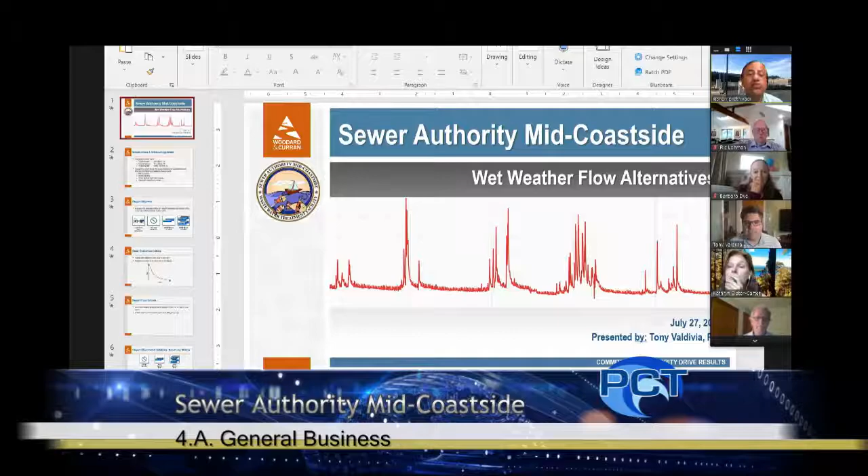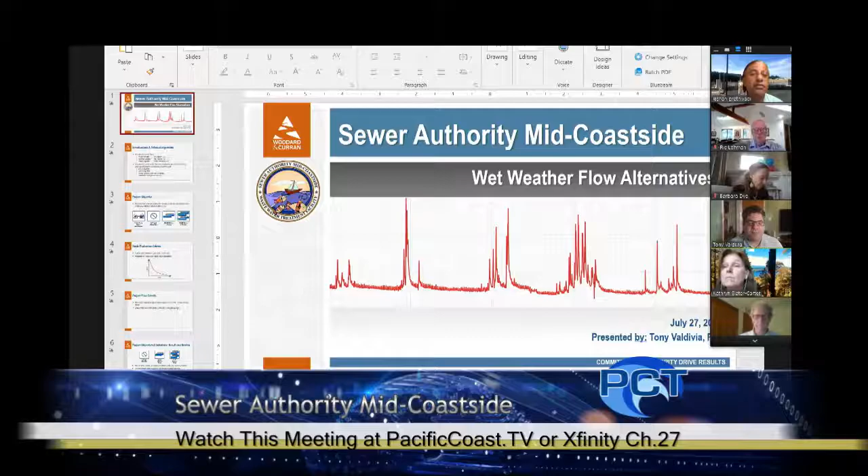Fantastic. Thanks, Kishan. I'm going to try to share my screen, and you guys please let me know when you can see it. Okay, I've given you authorization. Yep, okay, great. Can you see it now? Yes, I can see it. And you see the main presentation? Sometimes when we share these, it doesn't share the full presentation, it shares a version with a preview. Do you see just the first slide? No, we see down the side too. All right, one moment, I will correct that. Yep, I see just the slide now. Oh, you do? Okay, well, let's see if that sticks.

Wonderful. Whose heartbeat is that? I don't know.

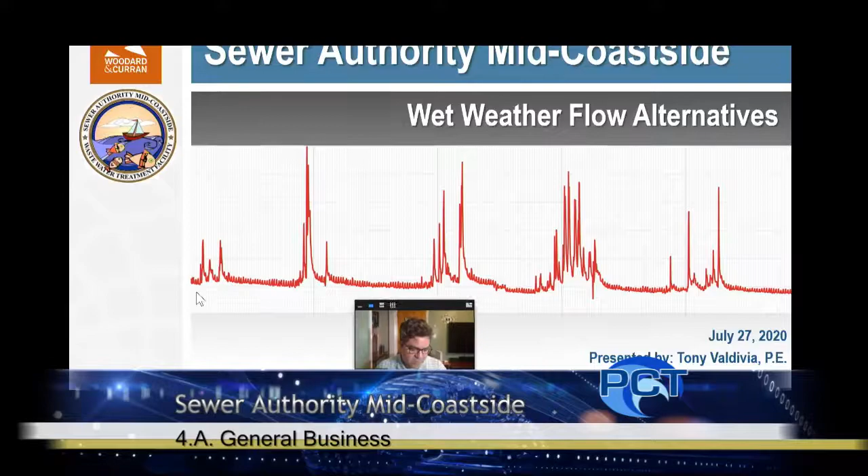Fantastic. So let me know if anything goes wrong with the presentation, please. I can no longer see you since I'm presenting, so if you do have questions and you'd like to stop me as we go, please do. My name is Tony Valdivia. I was the lead engineer for the analysis performed by Woodard and Curran. First of all, I'd like to thank you for the opportunity to do this work for SAM. Just a little bit more about our team and some acknowledgements.

Also on this call tonight is Jim Graydon, who's been the project manager for the effort. Our project engineer, Athena, was instrumental in doing the analysis. So thanks to both of them, of course.

Kishan mentioned the most recent analysis, but of course there's been quite a bit of work done recently and over the years to help SAM solve this problem in their system and really plan for the future. So our analysis is really built on that foundation. It's a strong foundation, and looking forward to sharing with you our results tonight.

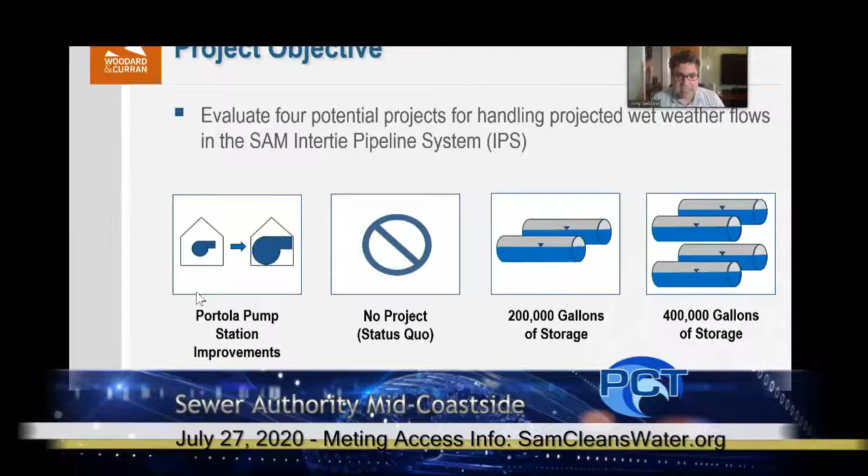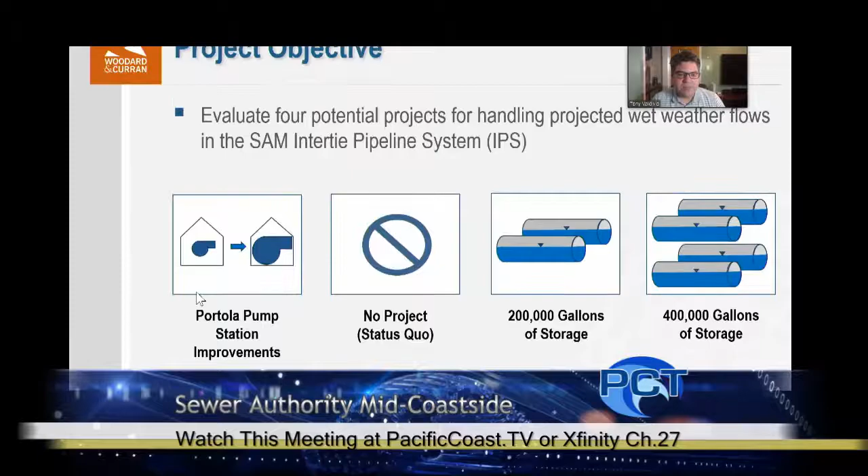So what was our project objective? As Kishan mentioned, we were asked to evaluate 4 potential projects for handling projected wet weather flows in the intertie pipeline system. These are the same analyses that wastewater management specialist was asked to review, so in a sense it is a true peer review of that work, but also looking back into the work that's been done to date. The projects are the Portola pump station improvements, a no project status quo option, 200,000 gallons of storage, which is the project that has bid several times, and then a larger storage option of 400,000 gallons of storage.

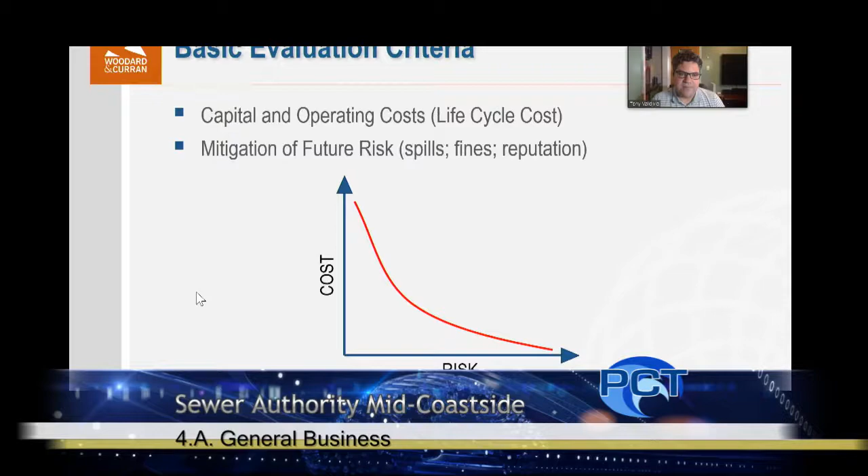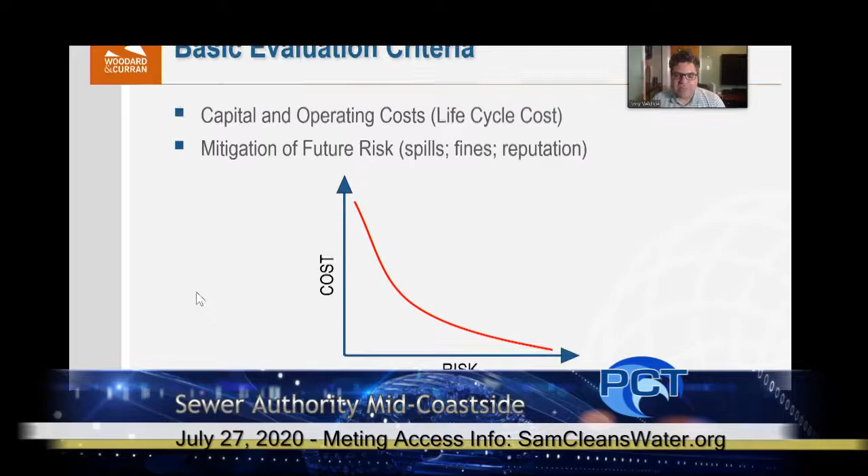Basic evaluation criteria, it's a pretty standard approach on the surface, where we're looking at the capital and operating costs, referred to as the life cycle costs in the analysis for each of the alternatives, but also the ability of those alternatives to mitigate future risk relative to spills, fines, and reputation of SAM. Of course, the curve here is generic, but I think it goes without saying that a higher cost project is generally going to help you mitigate more risk than a lower cost project, certainly true in this case.

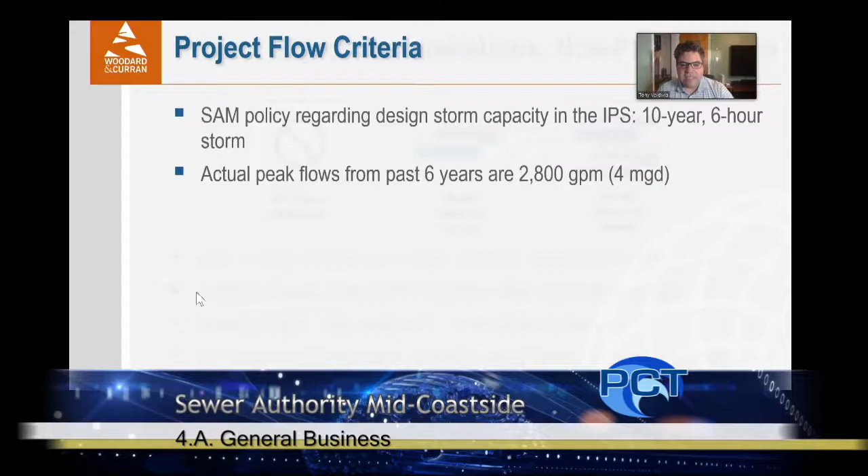Project flow criteria: SAM's board has set a policy that the IPS be capable of handling a 10-year, 6-hour storm. From the flow data that Kishan shared with us, we understand that over the past 6 years, peak flows may have been around 4 MGD, or 2,800 gallons per minute. However, that's not necessarily the storm that needs to be designed to. We'll get to that a little bit later in the presentation.

But first, a little bit about the objectives and limitations for the non-pump station options, which are shown here. Our approach, given the time that was available, was to really rely on prior studies by others, those other firms that I introduced early on, to define the project and the technical details of those projects.

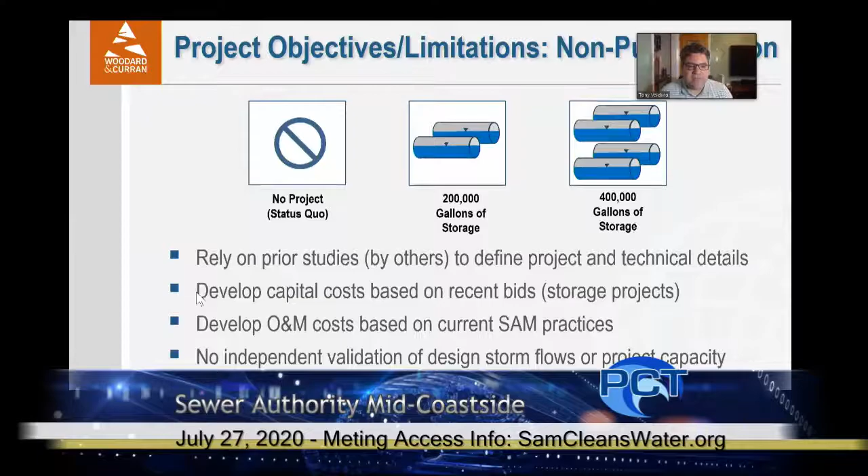We would develop capital costs based on the recent bid for the storage project, and because that was only done for the 200,000 gallon project, extrapolate those for a potential 400,000 gallon project. We would develop O&M costs based on current SAM practices—how much effort is really involved in maintaining the existing storage that you have in the system. And then, very importantly, we had done no independent validation of storm flows or project capacity. So we have relied on those previous reports to really define what those potential flows are into the Portola pump station, or which need to be stored for that matter.

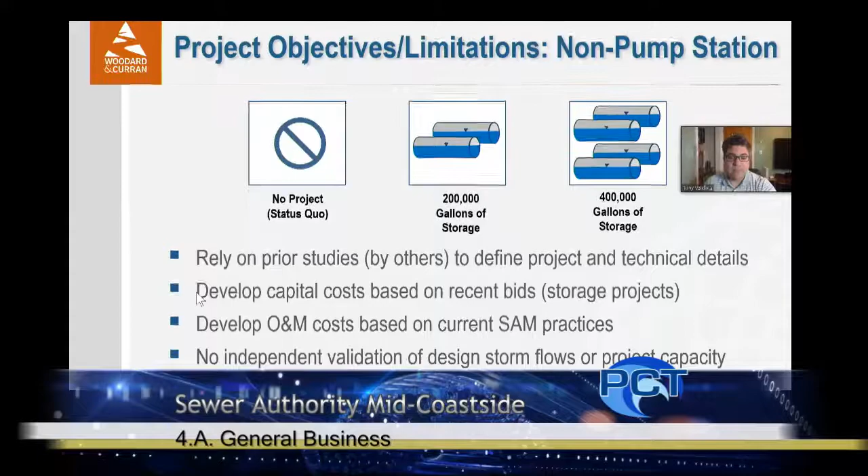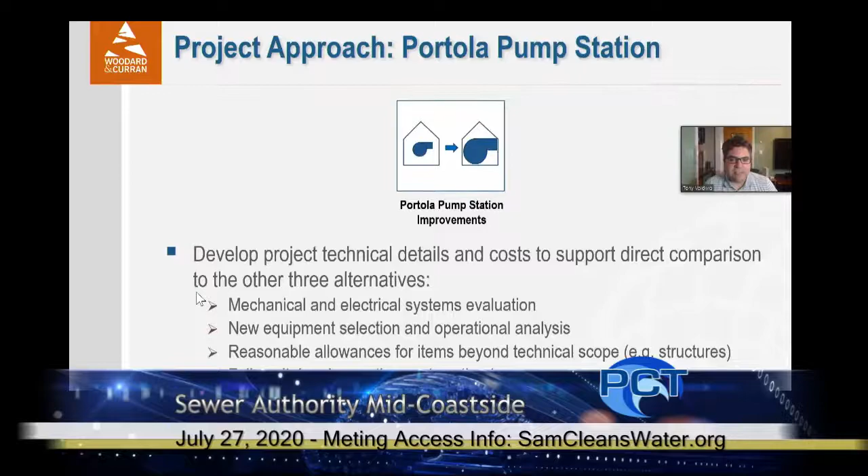For the Portola pump station, the approach was much more involved, and that's because this pump station alternative hasn't been bid as a project. It's not similar to another project. This is the project that needed to be fleshed out to add technical details and costs so it could be directly compared to the other three alternatives.

The most recent work by WMS certainly defined that project, and we tried to move that forward in a detailed fashion so that we could justify some of that cost data. Our work included mechanical and electrical systems evaluation, new equipment selection, and operational analysis for the pump station. We also included reasonable allowances for items that were beyond that technical scope, such as work on the structures or other items in the force main system, which we believe it's valid to assume will have to occur in order to make this project viable. And of course, we prepared full capital and operating cost estimates.

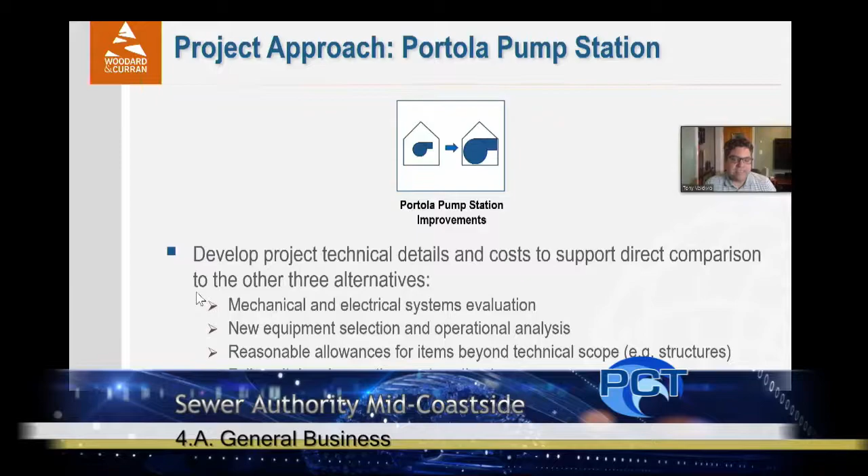There are some limitations to this approach. One is we did not look at the treatment plant. Clearly, a treatment plant with physical and biological processes is subject to some form of disruption if flows change significantly from what it was designed to do or has been doing. That was really beyond the scope of our analysis, but certainly it would be looked at if the pump station project were pursued. We also didn't do a detailed analysis of permitting requirements.

We do touch in the report on the potential to have complications relative to CEQA or Coastal Commission if the project is going to potentially be viewed to have a larger environmental footprint outside of the pump station building, or if it may potentially be viewed to be growth inducing because of the increase in capacity to move water to the plant. Both of those should be considered if moving forward with the pump station.

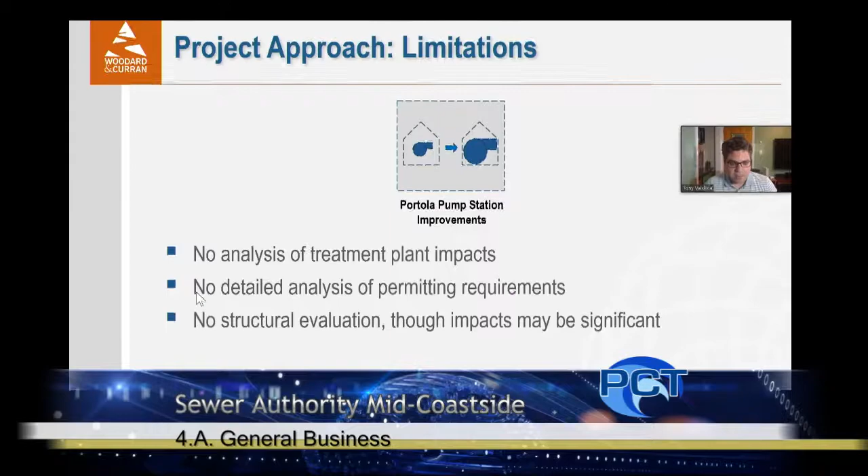And of course, we didn't do a structural evaluation of the building, but a building constructed in 1979, in our experience, won't have been built to current codes, but would require some level of retrofit, either for larger equipment or simply for life and safety, to make sure that building remains standing and functional during a seismic event. That would typically be done with a large retrofit project such as this.

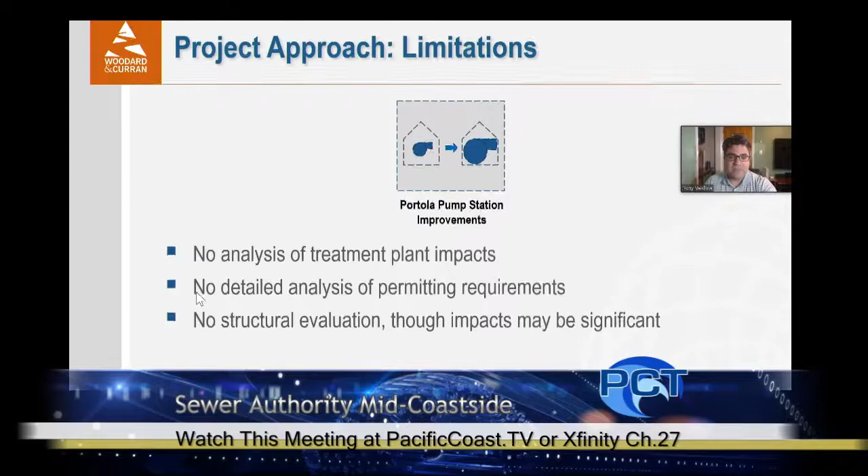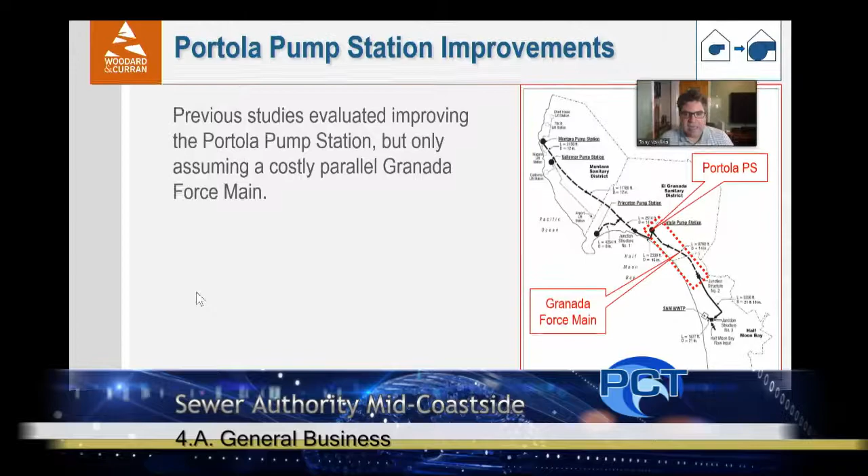So a little bit about the Portola pump station improvements. The idea to increase the size of the Portola pump station is not a new one. Previous studies have evaluated doing that project, doing an upgrade there, but it's always been considered relative to a costly parallel force main to parallel the Granada force main, that being the force main downstream of the pump station. It is an attractive project to be able to handle those flows and push them to the treatment plant.

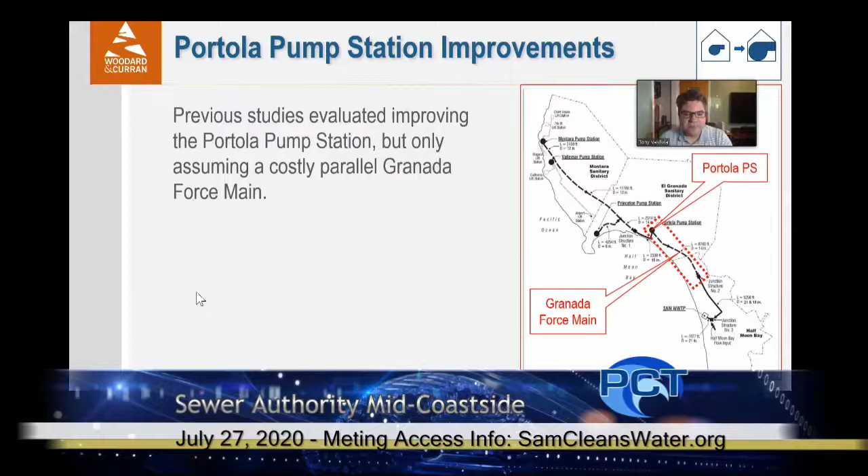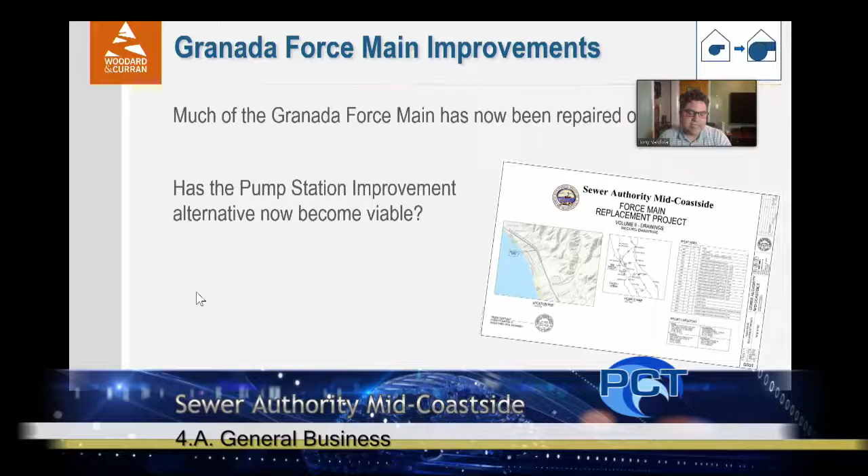But as we'll discuss here, the limitations of the Granada force main have really made that in the past prohibitively expensive. But that Granada force main is not the same force main that has been evaluated in the past. Much of that force main has now been repaired or replaced through action by SAM. And so the question now is, has that pump station improvement alternative now become viable? Do improvements to that force main allow the pump station to be upgraded, use the existing force main, and be cost effective? That was really where our focus was in the analysis that we performed.

A little bit about system hydraulics. I do get technical here, but I can walk you through any questions you've got. I wanted to draw attention to a couple items. What you're looking at here is the system curve. The system curves for this pump station were developed by SRT consultants as part of their work preparing for the current project, which will place 2 new 60 horsepower pumps at the station.

The capacity with new 60 horsepower pumps, and when I talk capacity, I'm talking about firm capacity, is 3,000 gallons per minute. Firm capacity is defined as the capacity of a pump station with its largest pumping unit out of service. So the largest pumping unit goes down, either planned or unplanned. What is the remaining capacity at the station? That's a critical concept because it is the standard for wastewater pump stations here in California, that you match the firm capacity of your pump station to the design capacity for the pump station.

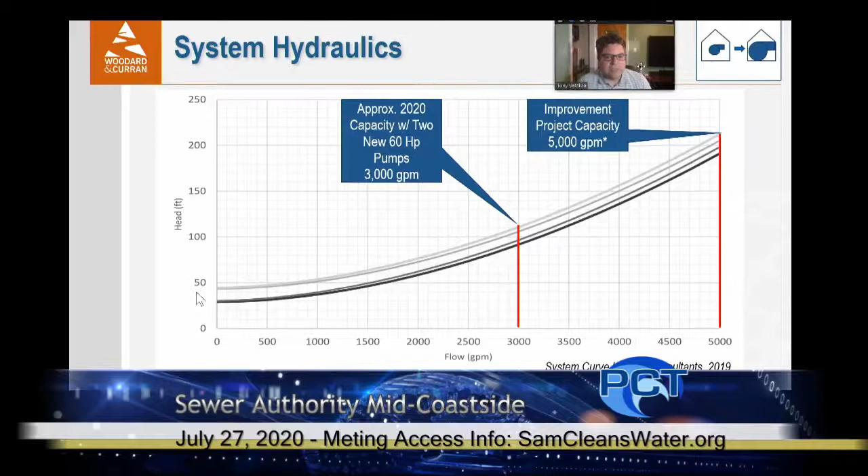The improvement project capacity that we evaluated is 5,000 gallons per minute. That was also the number used in the recent work by WMS. It's not known, in discussing it with Kishan, whether that actually correlates to the actual design flow that the board policy corresponds to. It is a number that has been used in the past, and for that reason we carry it forward. But I don't want to represent that Woodard and Curran has independently been able to validate that that number correlates to the design flow policy.

For reference, that 5,000 gallons per minute is about 7.2 million gallons. So what we're talking about doing is increasing flow capacity by just less than 70%, 67%, and the corresponding increase in head, or pressure energy that we need to add to the flow via the pump station, is 91%.

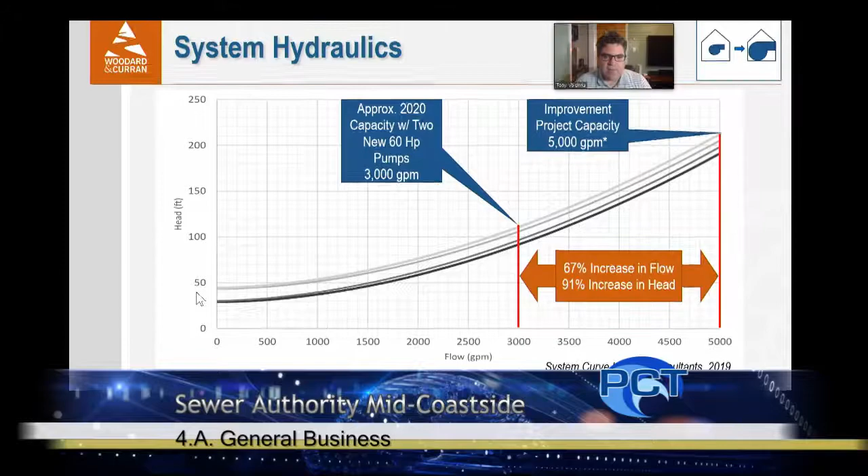Some key points that we make in the report are that at 5,000 gallons per minute, the force main velocity is over 10 feet per second. In our experience and opinion, that is very fast for raw wastewater flow, and it may result in long-term damage to the force main. The reason being that these are solids and grit-bearing waters. Moving them quickly through a force main, even the new force main, does have the potential to degrade the interior surface of even the HDPE, the new force main that's been installed by SAM.

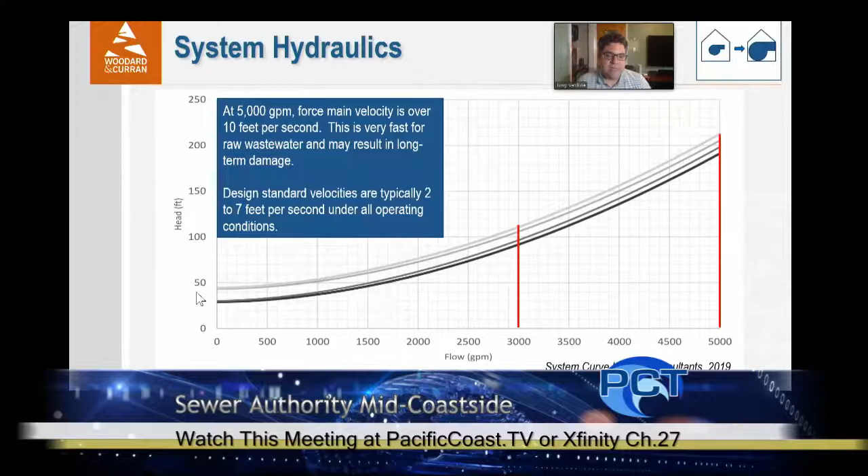Typically, when we look at force mains, we try to keep the flow velocities between 2 and 7 feet per second under all operating conditions, 5 feet per second being sort of optimum, but will allow a peak. So in our opinion, Woodard and Curran's opinion, planning to operate at 10 feet per second is potentially something that you would want to avoid.

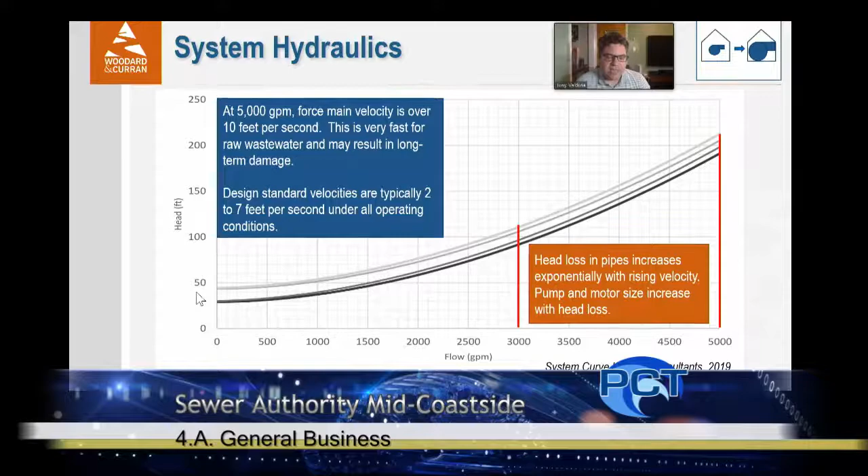It's certainly nothing we would design a force main for. We're designing it from scratch. One of the reasons for that is that head loss in pipes increases exponentially as the velocity goes up, and pump and motor sizes increase with head loss. So a consequence of moving flow through there at higher velocity, you'll incur additional friction head losses through the pipe. And to make up for that, the pumps at Portola Pump Station will get larger, and we'll talk a bit about the sizing of that.

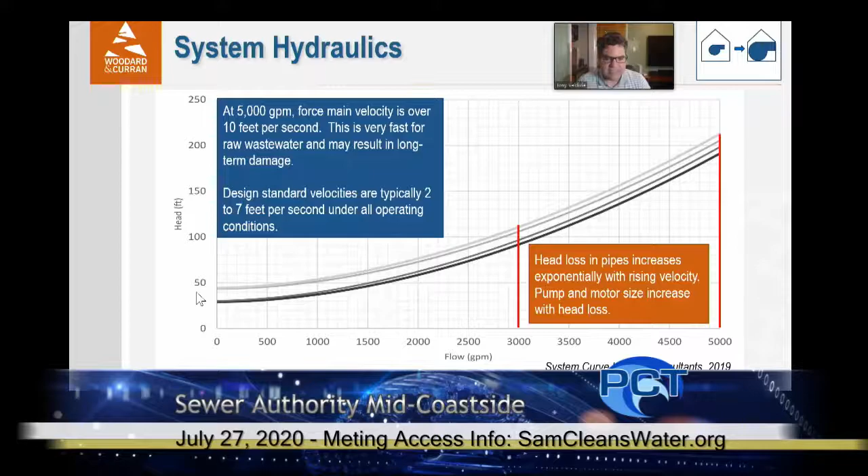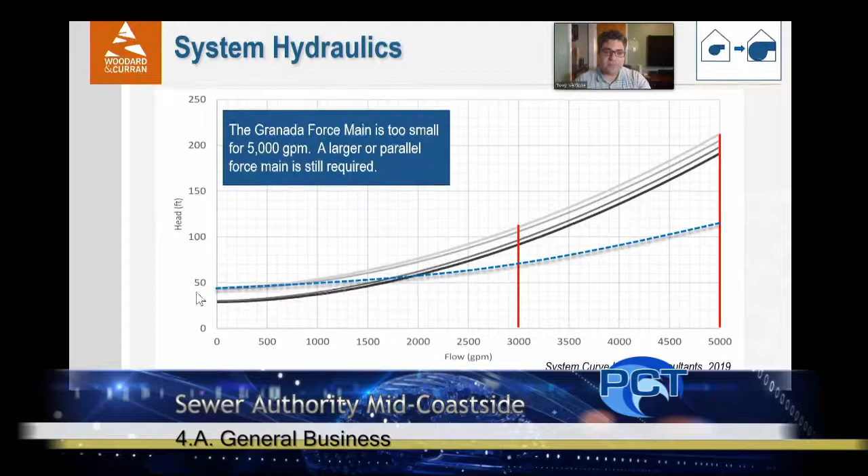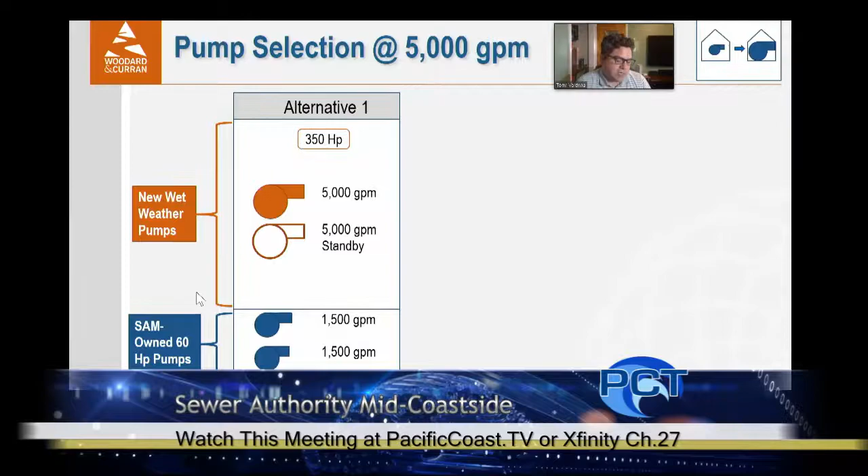Nevertheless, we have moved forward with the analysis of how to situate pumps inside of the existing pump station. We really did, at 5,000 gallons per minute, look at 3 alternatives. So here they are graphically. Alternative 1 - at the top of these graphs you'll see new wet weather pumps that we've identified that would be installed to pump that 5,000 gallons per minute. On the bottom are the SAM, the existing 60 horsepower pumps, the brand new Yeoman's pumps already purchased.

For alternative 1, we look at doing it with just one pump, capable of moving 5,000 gallons per minute. And as we've mentioned, because firm capacity is the standard we'd recommend adherence to, we have a standby pump there capable of that as well. Those are relatively large pumps - 350 horsepower. Alternative 2 adds another duty pump, so we remove one of the 60 horsepower pumps from active service and split that 5,000 gallons per minute over 2 pumps. As WMS concluded, that would take two approximately 250 horsepower pumps.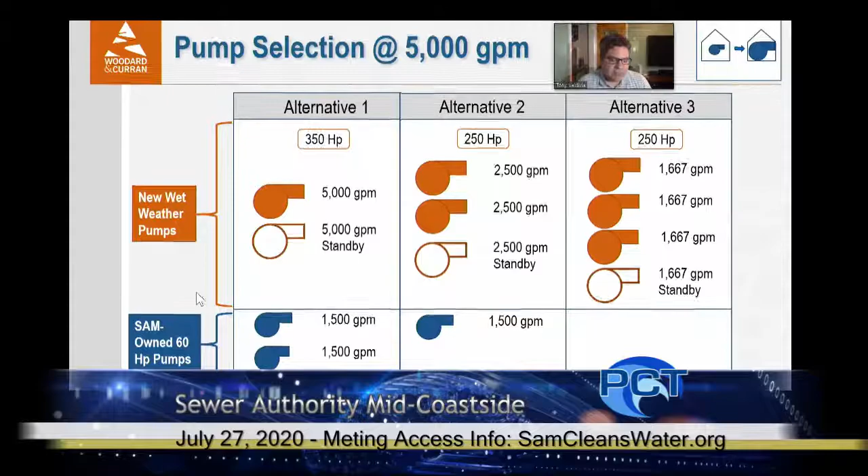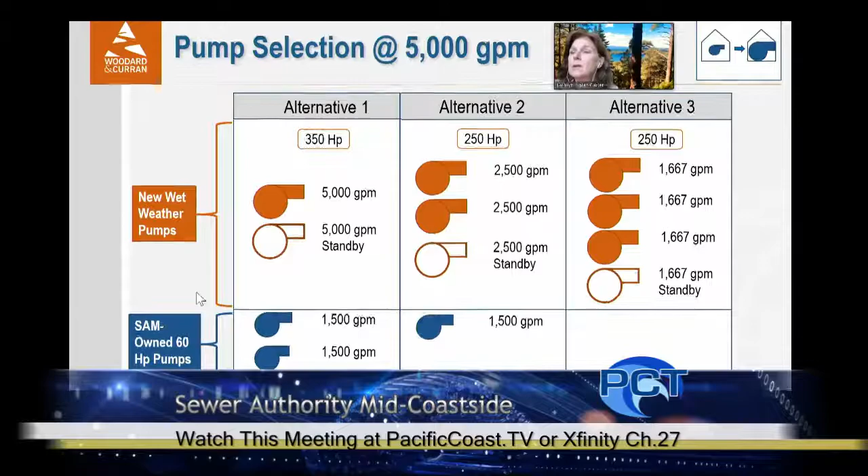Excuse me, alternative three. Excuse me, Tony. Yes, please. Could we ask people to mute so we don't hear the background noises? Will you please mute and allow only Tony's phone to be unmuted? Yeah, we're getting a lot of background noise. You can see who's not muted - folks who were not muted, please mute. Is it over? There's something about the voting. No. Maybe she needs to send from here. Huh? No, it's green. Who are not muted - the people I see who are not muted is now me, Keishan, and Tony, and everyone else on my list has the mute. The iPad is not muted. Can Keishan just mute them? Yes, just mute them. Keishan, just let me know when to continue since I can't see who's muted or not.

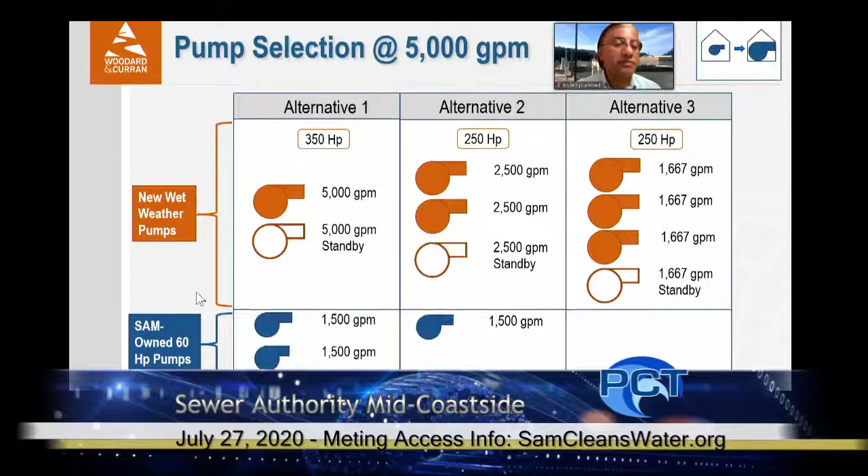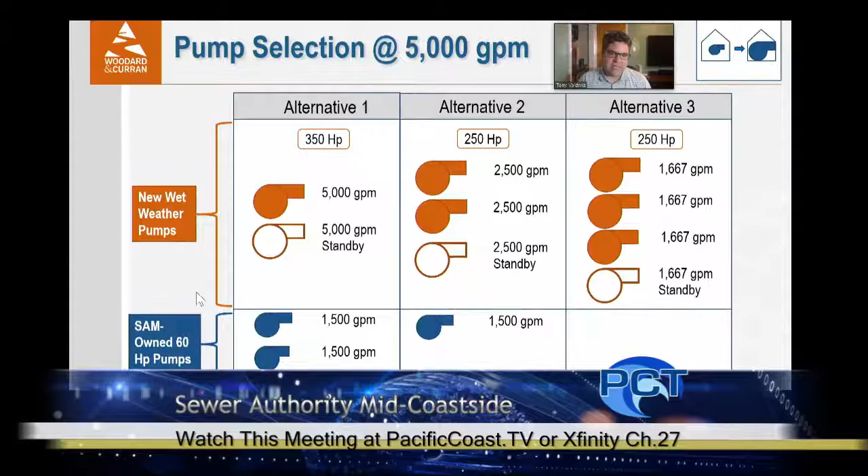Again, just changing the number of what we refer to as duty pumps - how many pumps are we using to really convey that 5,000 gallons per minute? If you're wondering why we only looked at 4 pumps, that's really the limit to this station as we see it, without a very significant overhaul of the dry pit. You have 4 pumps in there now. There are access issues - the pumps are pulled from above, and making more space in this dry well, which is approaching 30 feet deep, just doesn't seem realistic to us. So we stuck with 4 pumps for that reason.

But what I want to demonstrate on the screen - I can't see your screen, Tony. Oh, is everyone seeing it, or? I'm seeing it. Okay, I can see it. I can see it. Okay, go ahead, Tony. It must be something to do with my settings. Okay, well, unfortunately, I cannot see it either. I see it.

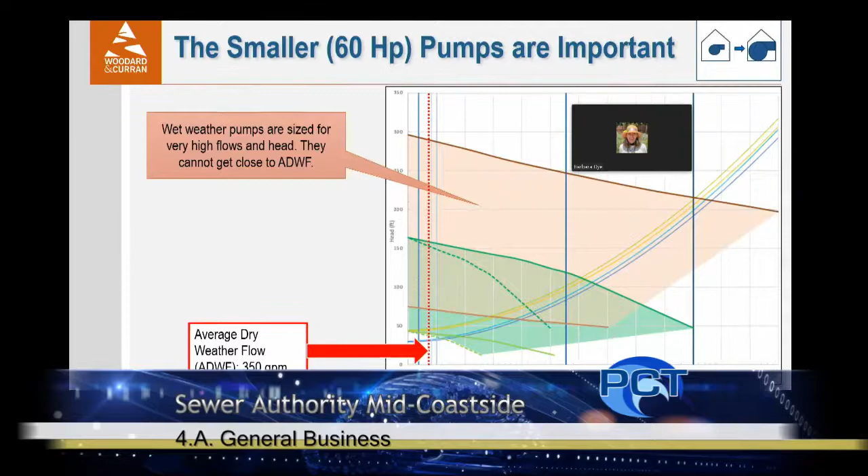Can I make a comment? This feels like a fairly complicated presentation that I'm not sure I'm ready to review tonight. It seems there's a lot of information presented here, somewhat different and presented in a different way from the report we received. Since my intention is to make a motion that we defer this to a later meeting, perhaps there's a way this information could be conveyed other than going through it tonight.

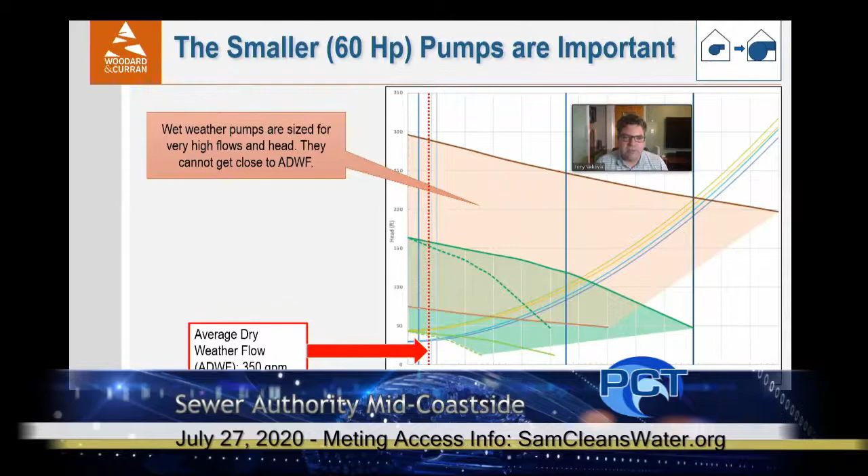One suggestion I might make is if the technical information, some of which was in the appendix to the report, is perhaps a bit much, we could fast forward a few slides to really where we start to talk about project costs, and focus less on the methodology. I think it's great to go ahead and finish the presentation, and then we can talk after with alternative discussion methods or something like that.

I'd like to see just the full presentation for now. Okay, and then we can talk about it afterwards. I would as well. All right.

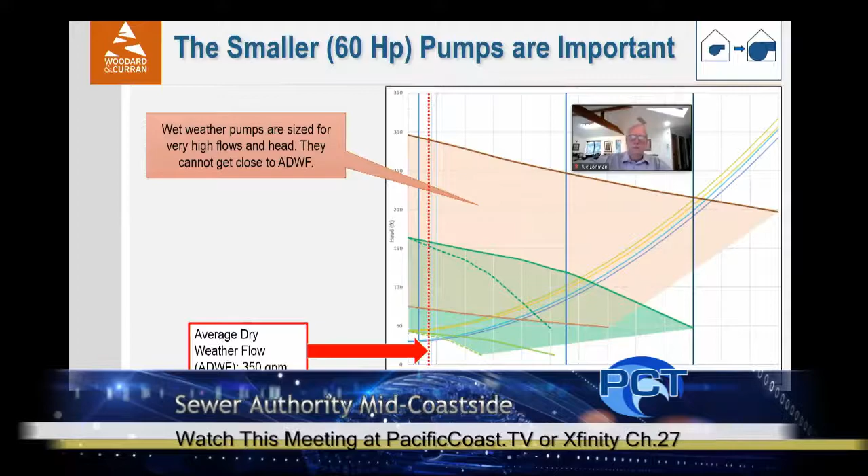So I guess unresolved is for folks having trouble seeing the presentation. Yeah, some can see it and some can't. I'm not sure how to resolve that through the Zoom interface. Well, I think what I'm going to do is leave the meeting and sign in again, maybe that will help. Keishan, you can see if I'm leaving now and I'll sign in. Okay, we can also publish the entire PowerPoint to everybody. Absolutely. Yeah, I can see your screen now, okay.

Is everyone back? I think we're still waiting on Chair Slater Carter. If you could just give me a thumbs up when everyone's back, since I can't see the Zoom interface. Sure. So the screen you have now has got the title, smaller 60 horsepower pumps are important, right? Yes, that's good.

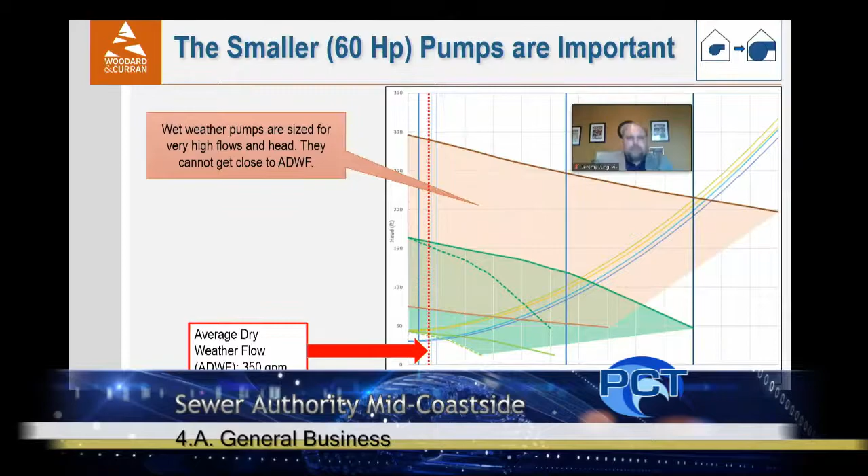Here she comes. I am back, so I will mute myself. And now I see the lovely graphic. Oh fantastic, all right, well I will continue on. And by all means, please do interrupt me if there's questions or anything's unclear.

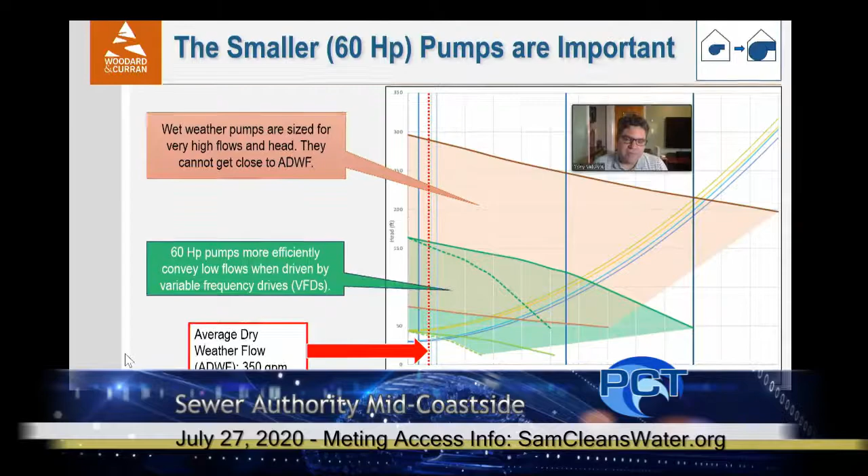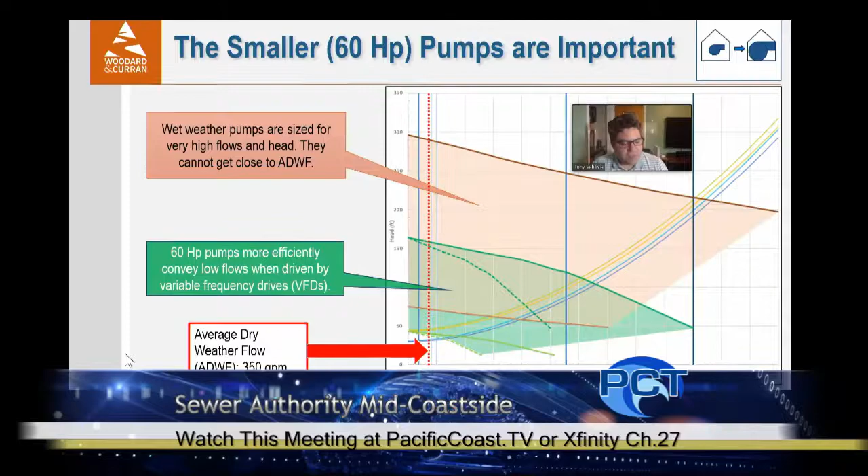The point we wanted to make on this slide is that the 60 horsepower pumps, the green area of this curve, allow you to get to lower flows and lower heads than the large pumps we're contemplating as part of this project would permit. That's because for most of the operating year, your flows into the Portola pump station are relatively low, an average dry weather flow of 350 gallons per minute versus the 5,000 we're talking about for peak flows. So we think it's important to maintain some smaller pumps, particularly because the district, or SAM, has recently invested in these new pumps, so there's a good chance to make use of those as part of this project. But that means we're going to eliminate alternatives that didn't include any of those small pumps, and really try to maximize the advantage of having them.

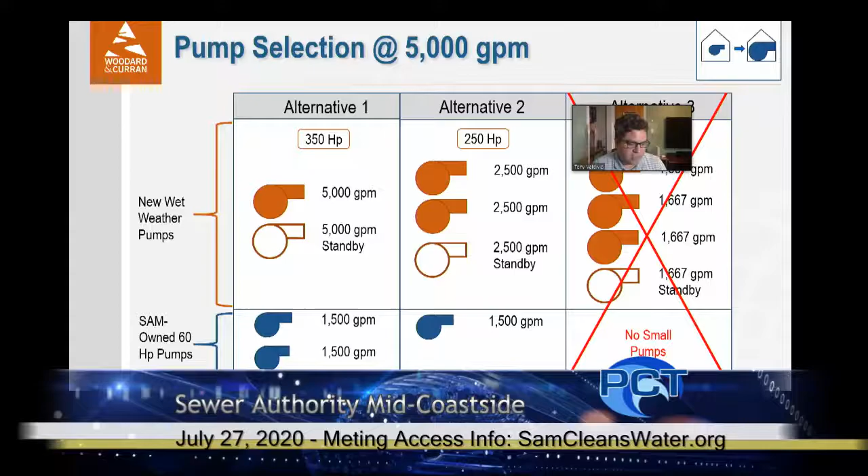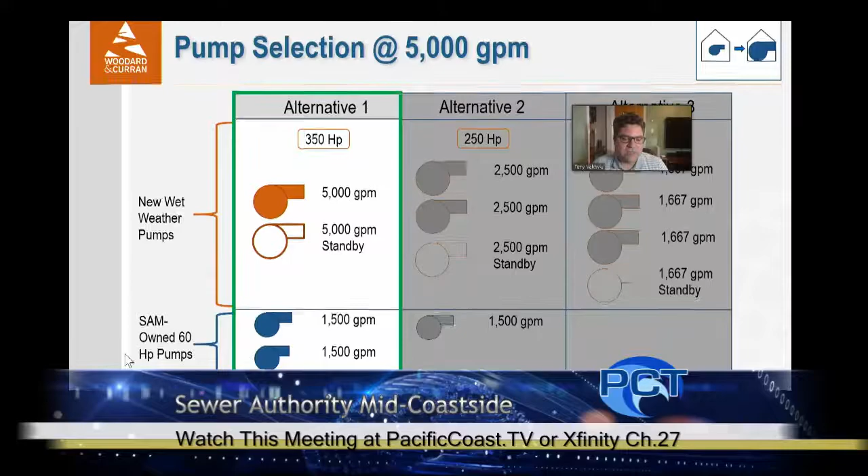That leaves a couple alternatives. In the memo, we go through the cost analysis between alternatives 1 and 2 and determine that at a planning level, there's really not a significant difference in cost between those, as it turns out. So we select alternative 1, the option that allows you to keep 2 of your existing new pumps in service while replacing 2 of the others at the station with larger pumps.

Other pump station electrical improvements that we looked at: we chased the pump and motor horsepower through the entire electrical system and determined there's a significant amount of work to be done there. Not surprising when you consider that we're increasing the horsepower of the station by so much.

A new standby generator, which would be moved out of the building, a new main distribution and switchboard, new variable frequency drives for all pumps, a new motor control center for the smaller loads, new HVAC system for air conditioning because we're adding additional heat loads to the building, and new room configurations to make better use of the space inside the building.

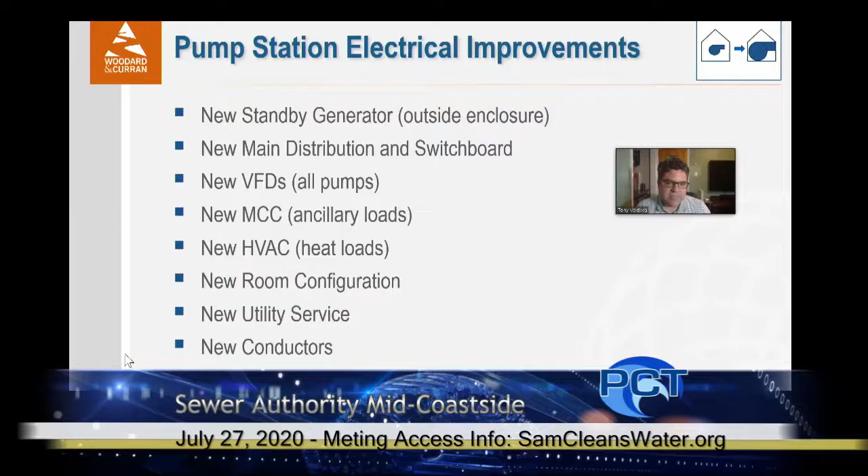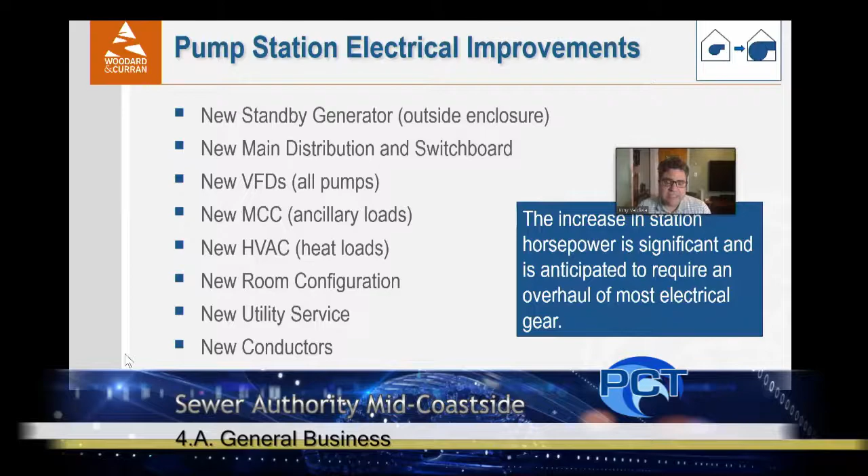The generator room will free up, and we'll move some panels inside of there. A new utility service, assuming it wasn't sized for this size facility, and then new conductors, the wires that actually bring the power to the pump. So it's a substantial list of requirements that would need to be met, and it requires really an overhaul of most of the electrical systems at the station. Our estimates and project description really account for that.

Additional assumptions that we've had to make, also as detailed in the memo: a new surge tank. As you increase velocities through those pipelines, you also increase the potential for damaging surges in the event of a sudden power outage, for example, while the pumps are running. So a new surge tank, either to replace or in addition to the existing surge tank you recently installed.

Structural retrofit we talked about, that's likely. We've included some dollars in there. There's really no way to validate that without a detailed structural analysis.

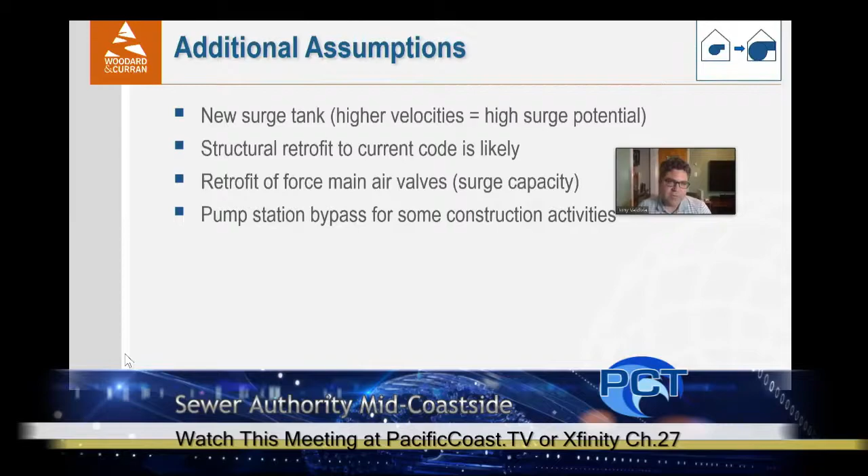Retrofit of force main air valves, again, because those air valves have some ability to relieve surge, or at least admit air in the event of negative pressures. And then pump station bypass for some construction activities where the wet well or dry well or portions thereof need to be taken out of service. We're assuming some level of bypass as part of that.

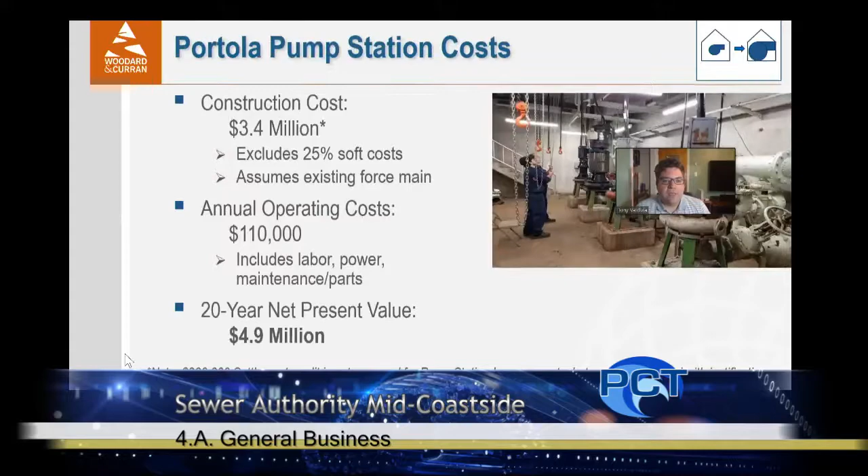So where do we land? Back in the realm of costs, the construction cost that we arrive at is about $3.4 million. To keep it as a fair comparison with the other alternatives, including the one that's already bid, we've excluded soft costs from that number, but that would typically be engineering, administration, construction management, and then engineering services during construction, about 25%. And it assumes use, as we've discussed, of the existing force main.

Annual operating costs is an estimate, but it includes labor, power, maintenance, and parts for the station to operate it. We also did a fairly basic net present value analysis for comparison purposes, where we pulled together those annual operating costs over a 20-year period and bring those back to a net present value.

When I say fairly basic, I mean that we're not taking into account things like inflation, et cetera. For comparison purposes of capital projects such as this, that's a fairly standard approach. It's not the same as a rate analysis, and I certainly wouldn't want you to do your capital improvement planning based on these annual numbers. So treat this total life cycle cost as what it is, which is a number developed on the same basis across all projects to allow a comparison.

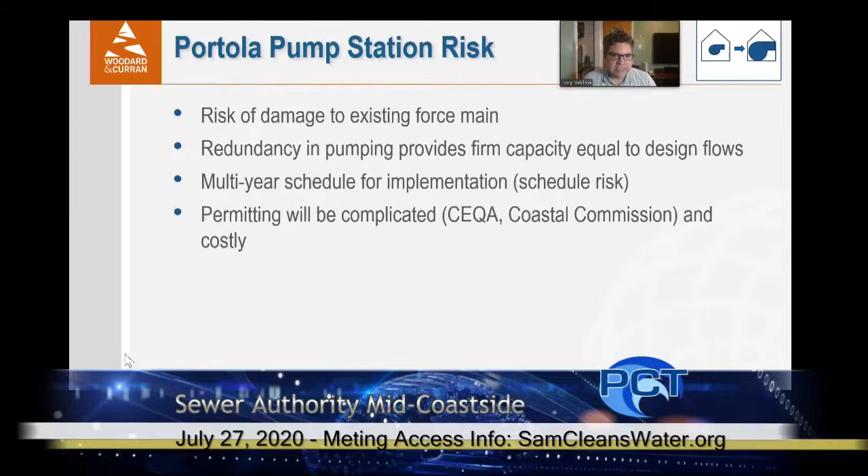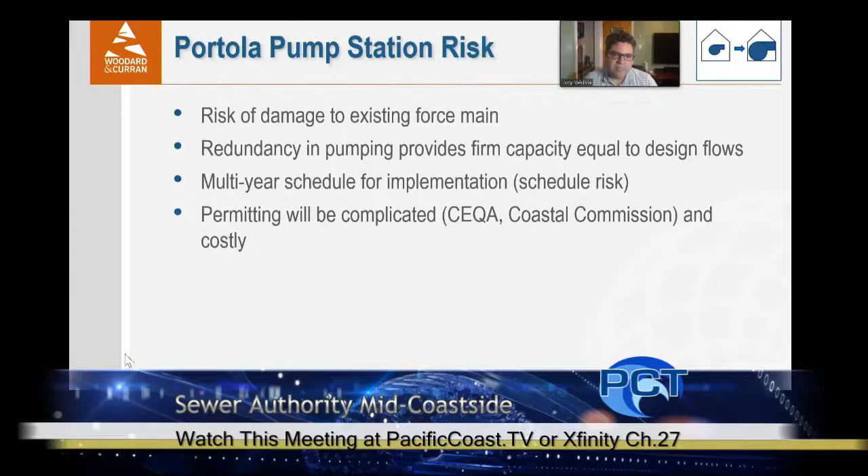It does have a multi-year schedule for implementation, which is a potential schedule risk because it takes longer to implement. Design could take anywhere up to a year, maybe 8 months to a year. Construction would at least take a year. And that doesn't include permitting, which we're estimating could be complicated and therefore rather time intensive if there's a CEQA or Coastal Commission component to that.

The no-project alternative. We didn't redefine these alternatives from previous work, we just summarize them in the report. There's an initial cost associated with this one, as you know, whereby you would forfeit that settlement credit payment from the regional board and have to make that cost.

There is an annual cost that we've associated with this one, and I want to walk you through why. First and foremost, there is the Portola pump station, which even under this alternative would continue to operate in its existing capacity. So it makes sense that for comparison purposes we would have to take that into account. We're estimating that here as 97,000.

Thinking back to the Portola pump station alternative where it was about 110, that difference may not seem large. Part of that's because these big pumps put in to pump peak wet weather flows don't operate a lot of the time, so the net actual increase in operating costs isn't as significant as you may think.

We have associated with this one some labor, equipment rental, and maintenance for high flow management. We haven't verified that number, but I did like that in the WMS report they likened this project in cost to the 200,000 gallon storage project. The reason they did that is because SAM has a very proactive approach to managing high flows in the system, but in being proactive it is labor intensive.

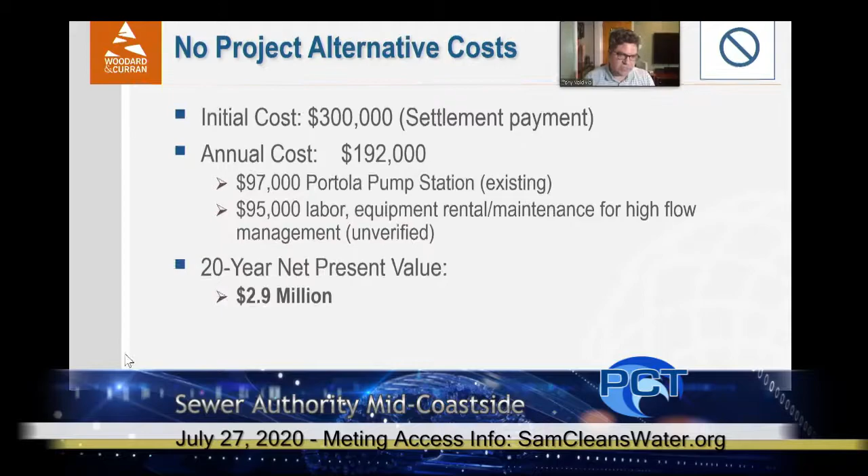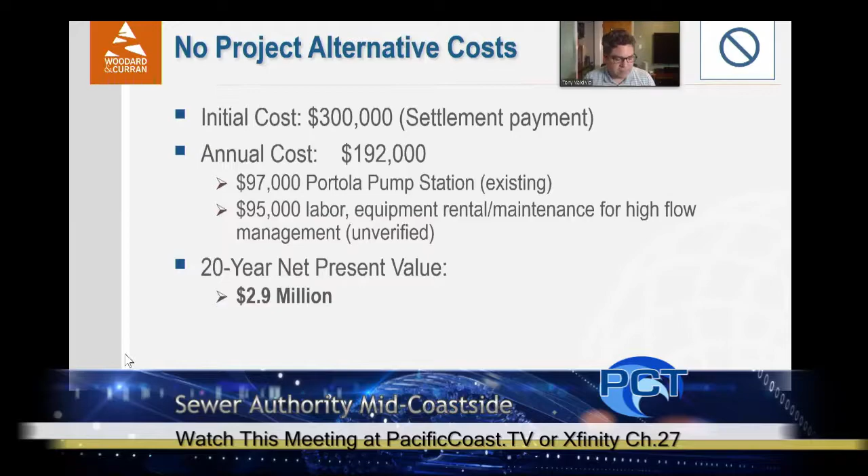It takes operators away from the plant and into the system to make sure it's storing flow in Baker tanks, temporary facilities. So it's a relatively labor intensive number. We gave it a value of $95,000 per year, again roughly the equivalent of the 200,000 gallon storage project in terms of its initial cost. In that respect we're agreeing with WMS that there are costs associated with the no-project alternative, and we wanted to capture those, though we haven't been able to verify the exact numbers.

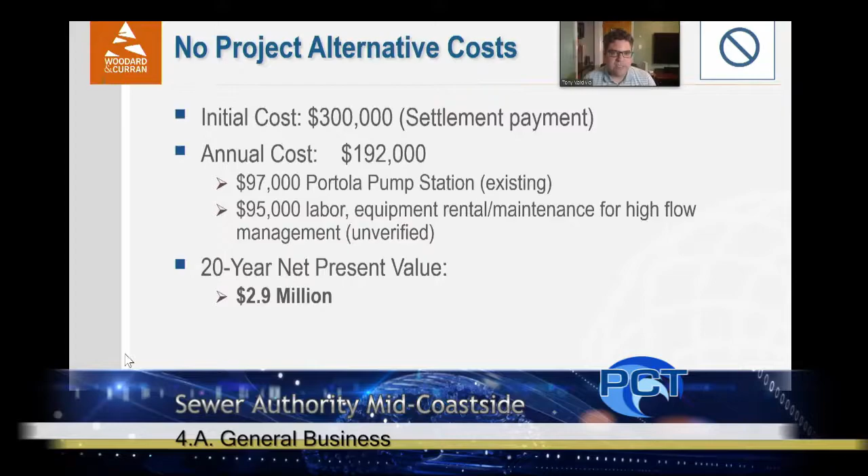Using the same 20-year net present value approach, it gives you $2.9 million for this alternative. So the no-project alternative does have a cost, most definitely.

What are the risks or risk mitigations associated with this project? Like I've been mentioning, the labor and maintenance intensive approach is a risk. It pulls folks away from where you may need them at the treatment plant to be in the system actively managing flows, as opposed to having a passive pump station project.

And then there's the softer side of things. The failure to complete a capacity improvement project per that settlement agreement is likely to place SAM under additional scrutiny and increased risk of larger fines or legal action in the event of a spill. This is a real thing. We know that the regional board is likely to view the decision to do nothing, in the event of a future spill, as a problem and a reason to potentially come down harder on SAM. It's not a position we could recommend putting ourselves in if there are other alternatives.

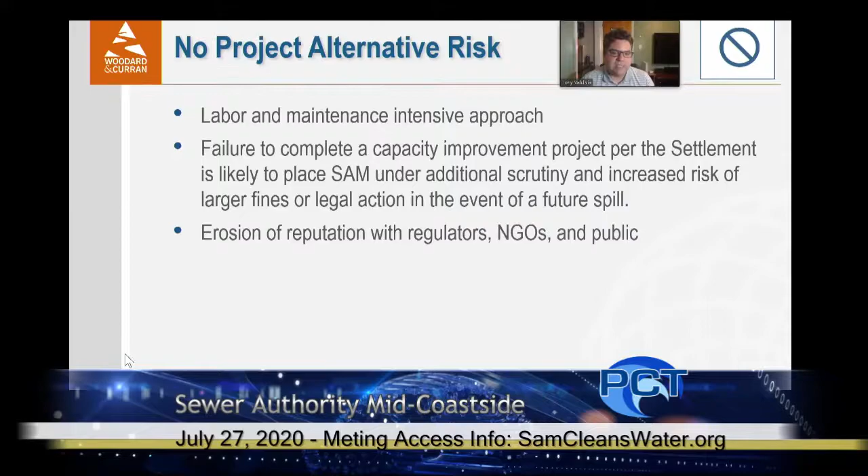And that goes along with the erosion of reputation with regulators, NGOs, or the public in the event that there is a problem in the future and a project wasn't implemented when it could have been, when there were alternatives to do so.

Next project is the 200,000 gallon storage cost. This is a very well-defined project because it's been out to bid several times, so the construction cost at $1.4 million is relatively known. Again, we're not adding soft costs to these, but this one would have lower soft costs if we did, because it's a shovel-ready project. It's still going to have some administrative costs during the construction phase, but the design and permitting has been taken care of.

Settlement credit would apply to this, as negotiated with the regional board, of $300,000. Net construction costs are at $1.1 million. So here we take a discount of the construction costs to account for that settlement credit. We can talk about that more maybe at the conclusion of the presentation and how that impacts the total costs.

But I think what we were looking at from SAM's perspective in terms of out-of-pocket money - presumably that $300,000 credit could be put into the project, but it's not necessarily a check, it's not cash that you put into it. Annual operating costs are just operating the Portola pump station as you do now, but again, for comparison purposes, we throw that in here, and then you have your net present value.

Relative to risk, there's the passive overflow, which of course is not dependent on mechanical systems. So you have storage tanks that fill and drain by gravity. SAM has indicated to us that the cost so far for existing facilities of this type, it takes relatively little labor effort to maintain them, which means you have high availability.

When you need it, it's there, it's in service, and there's value to that. But at this size, based on reports that have been done in the past, you're not expected to be able to manage your 10-year, 6-hour flow. Again, we haven't independently verified that, but based on work done by other consulting firms in the past, this level of storage doesn't get you to that level of containment.

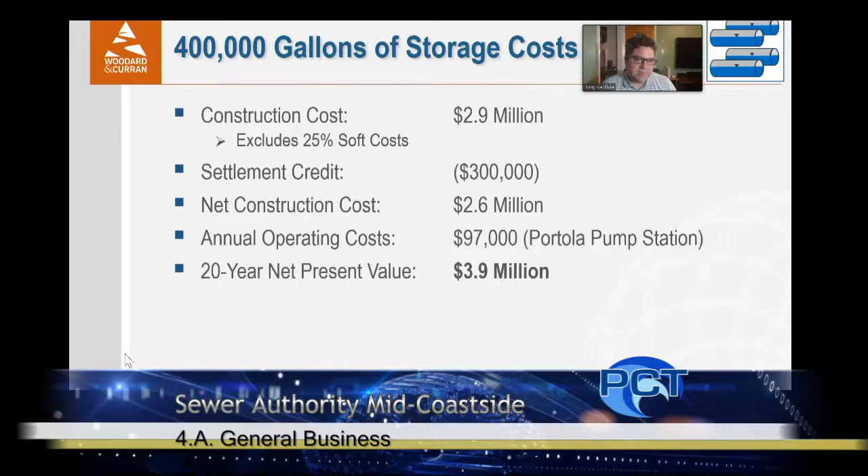Which brings us to the 400,000 gallons of storage costs. Here we've escalated the cost, the $1.4 million for the 200,000 up. When we did that, we do have to acknowledge that this project isn't as well defined, and therefore there's some contingencies that result in the cost being slightly more than double. Those contingencies would be fleshed out during the design process, potentially bringing that cost down, but this is where we've arrived. Settlement credit, as we've discussed, we assume that the regional board would consider twice the storage just as good as the 200,000 gallons of storage.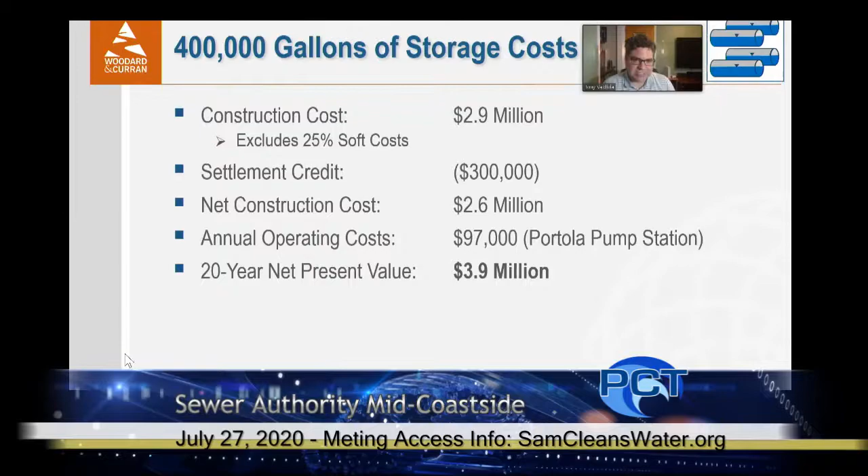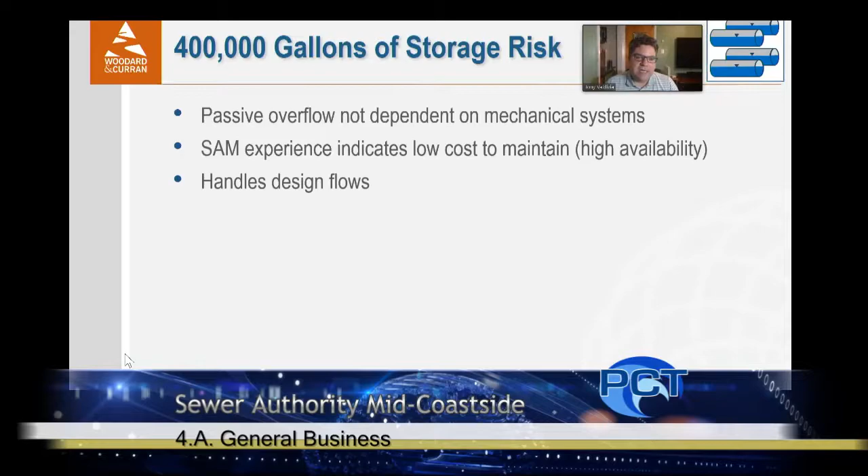Annual operating costs are the same as the previous alternative, and a 20-year net present value of $3.9 million. And it has, as you might imagine, the same benefits as the 200,000 gallon storage project, with the addition of this bottom point, which is according to previous analyses, 600,000 gallons of total storage. The new 400,000 gallons that we're contemplating here, plus the existing 200,000, is expected or has been projected to handle that 10-year, 6-hour storm.

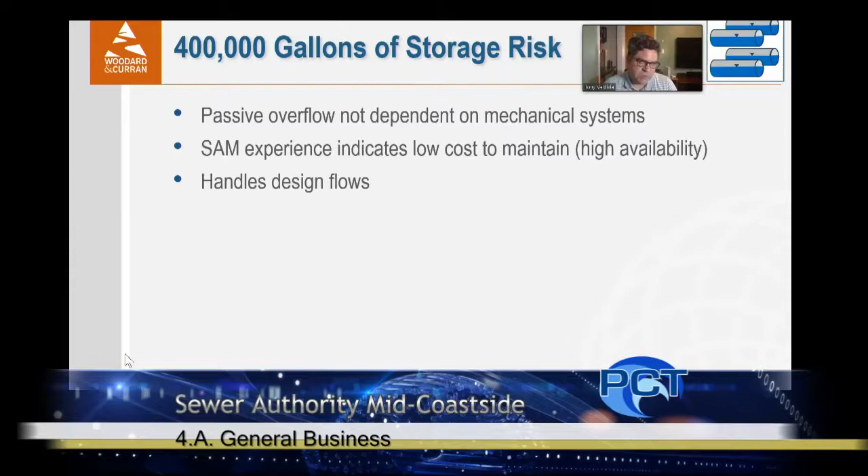So where does that put us in terms of a summary? Well, it puts us, we've summarized here sort of the cost information we just ran through and the net present value, and then sort of a qualitative review of the risk assessment, which is what I want to focus on this slide. Risk assessment for the pump station improvements, again, because that force main is, for lack of a better term, the weak link, or at least the link that is of most concern here. It's a moderate level of risk.

The force main remains your single point of failure in that system. The no project alternative comes along with a high risk, in our opinion, because the failure to complete an improvement alternative or a capacity improvement would put you at greater risk, we feel, relative to regulatory agencies in the event of a future spill, and also lawsuits from NGOs, and then your public reputation.

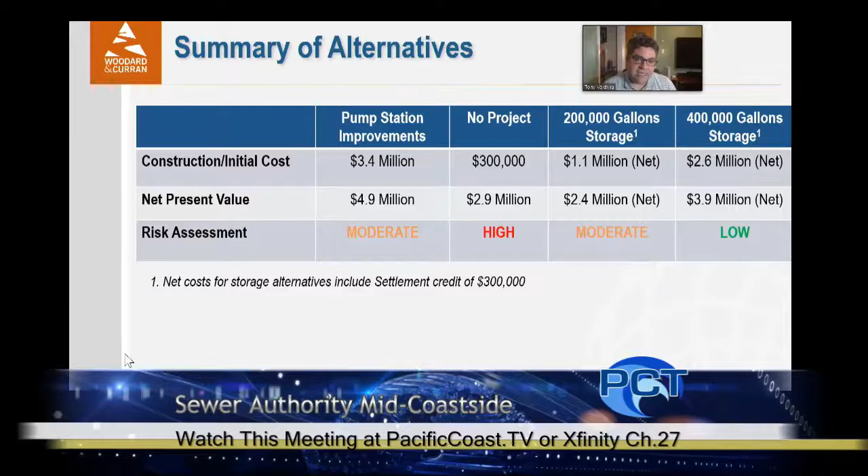There's the 200,000 gallons of storage, which we think is a moderate risk. And the reason we're characterizing that as a moderate risk, even though it, per previous evaluations, doesn't have your full design storm flow, is because that design storm flow is a value that we don't necessarily know is correct, but we haven't been able to independently verify that. You do have, however, the Carollo study that was done that initially indicated that what you need is the 400,000 gallons of storage, which is why the next project is categorized as low risk.

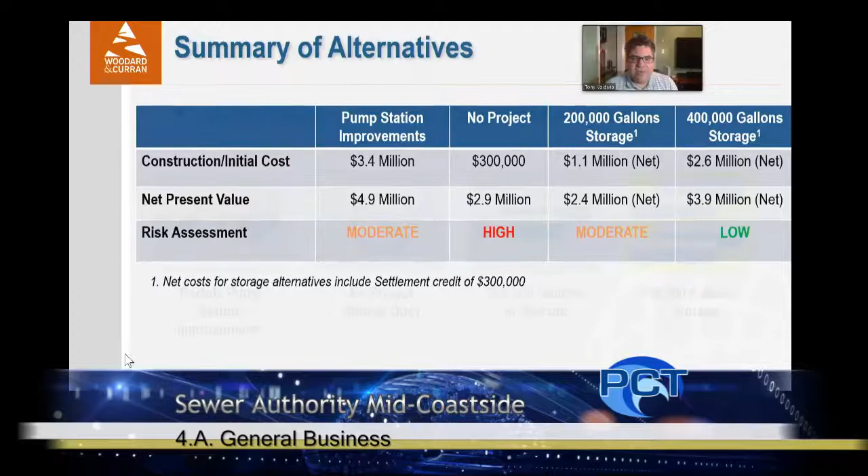With all this in mind, where do we end up? We end up with a recommendation to pursue the 400,000 gallons of storage in your system as a passive overflow facility. We've talked about the relative good risk profile of that, being able to rely on that to drain and fill without a mechanical system. It does, according to the previous work that's been done, contain the design level storm, so it meets that board policy. And it has, in our opinion, a reasonable life cycle and capital costs associated with it.

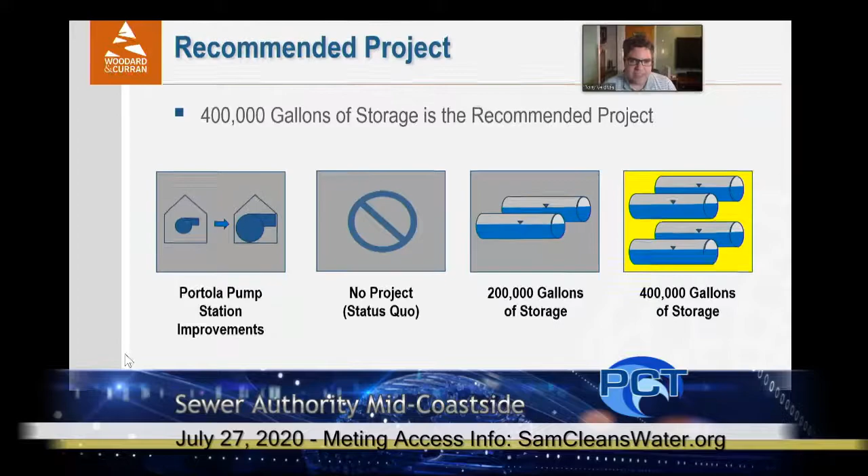That said, there's a couple other additional considerations before I wrap up. Storage can be phased as part of capital expenditure planning. So two 200,000 gallon projects are going to cost marginally more than a single one. That's because you lose the economy of scale, but it does give you the ability to move forward with the project that is designed and shovel ready now, while budgeting for a future project to duplicate it. And so there is the ability to really phase that to match capital budget planning.

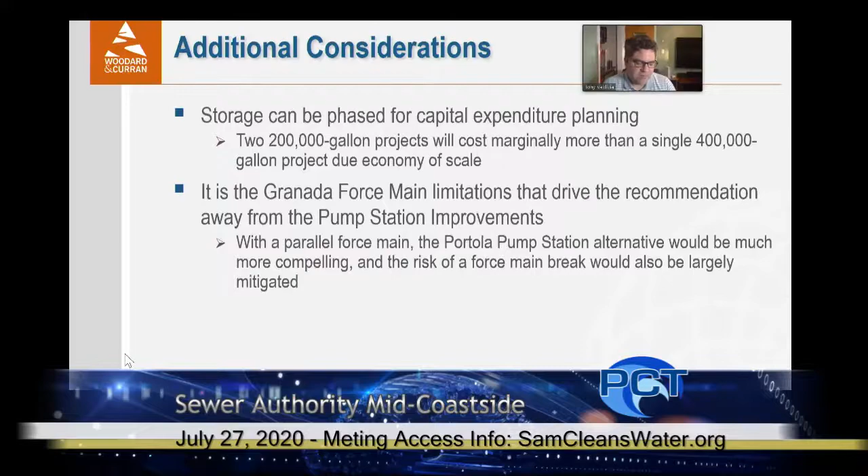Second point here, it really is the Granada force main limitations that are driving this recommendation away from the pump station improvements. As has been found in the past, if with a parallel force main there, that pump station alternative is going to be much more compelling because it's going to give you the ability, without storing it in the system, to just move that water through to the treatment plant. And then you also eliminate some of the risk associated with having a single force main system with limited ability to take it down for service and inspection. So it's really the Granada force main that is making that pump station difficult to recommend as conceptualized here.

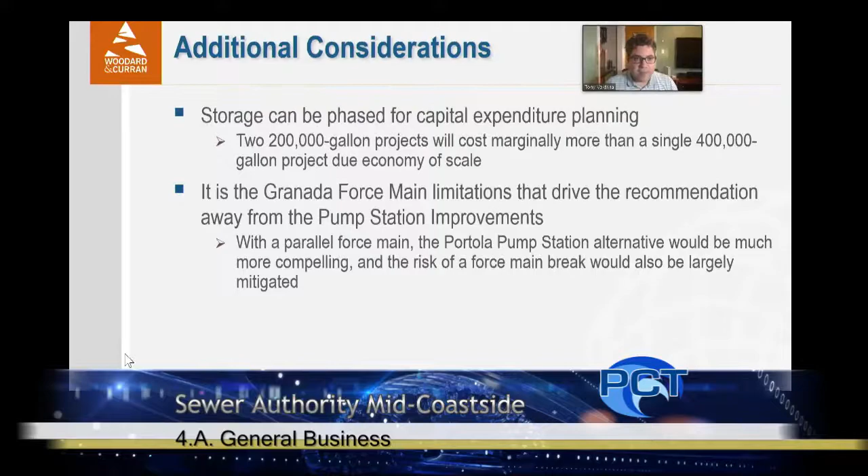With that, we have made it through to the end of the presentation. So I want to thank you again for the opportunity to work on this effort. It's a very interesting project. And certainly I'm available to answer any questions or comments you have.

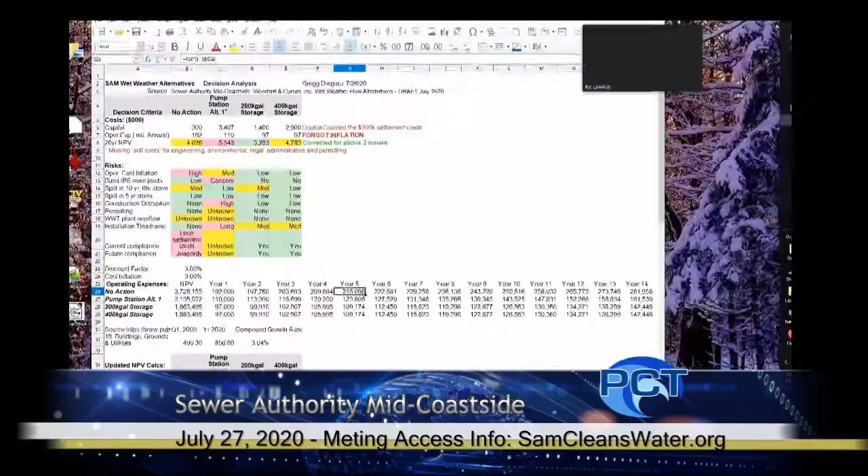Kathryn, I've got a quick procedure question. Is the agenda item and the goal tonight to receive the report, or are we going to work for 2 or 3 hours discussing it or arguing about it? I thought it was just to receive the report.

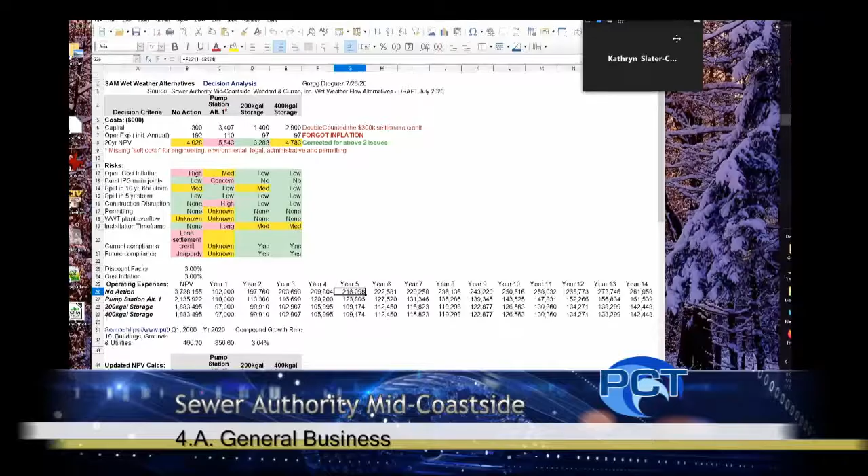The item is to accept the report, and I'm going to suggest that we have until August 3rd to submit any questions that Kishan and the engineers feel need more explanation than what's in the staff report and in the PowerPoint. We can discuss that then on August 10th. But that's fine, we need to discuss this before we can adopt it.

So Gregg, let's start with you. I'm trying to screen share. Can anybody see it? I see it. Yes, I can see it. It's a spreadsheet. Okay, so I believe Kishan forwarded this to Barbara and John Blanchard because I didn't have their emails. What I tried to do was take the decision criteria which were embedded in the report and present them graphically. So there's a group of cells over here colored pink, yellow, and green.

I did not include every decision criteria because one was just mentioned tonight about the possible need for an earthquake retrofit if we did the pump station alternative. So I don't have a row for that. That would increase the risk of that and cost of that project.

I also thought of one that was not mentioned, which is an extended power outage. There are other agencies that have run into trouble with the recent PG&E shutdowns where backup generators fail to provide power. So there's a risk possibility there, especially for an alternative like the pump station, which relies 100% on electricity. So we might want to consider adding that in. I'll defer to the engineering experts as to whether that's a material risk to be listed.

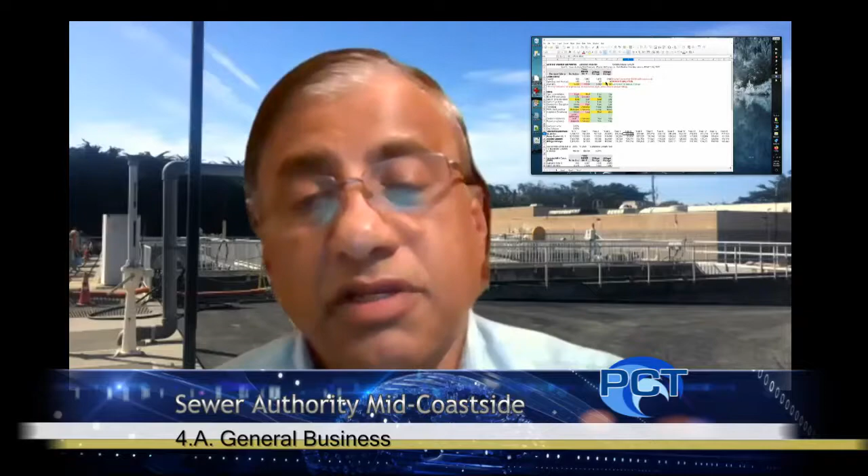Well, it's hard to say. It depends on when we award the contract. We also have to be careful because we can't do grading during the wet weather season. So we have to get our grading done - is it in September?

Let me wrap up my session saying, we already heard the pump station isn't going to be done in a year, okay? It looks like 200,000 gallons of storage. At least you've got the design done. I don't know that you can do the 400,000 gallon storage in a year.

I kind of like the idea of doing it because of the reduction in risk, but at the costs that are forecast, I would have to agree with Tony. You'd be better off to do 200 now and another 200 later. But it sounds like you're going to throw away $300,000 if you don't hurry up and get started on the 200,000 gallon storage tank. So I'd like to hear a little discussion about why we're not moving ahead with what is obviously lower cost and lower risk than the other alternatives when we're under a deadline.

Thank you, Kathryn. And that discussion is agendized for August 10th. Let me see, I see Gregg's hand. I don't see any more public comments. Let's bring the discussion back to the board and start with Rick.